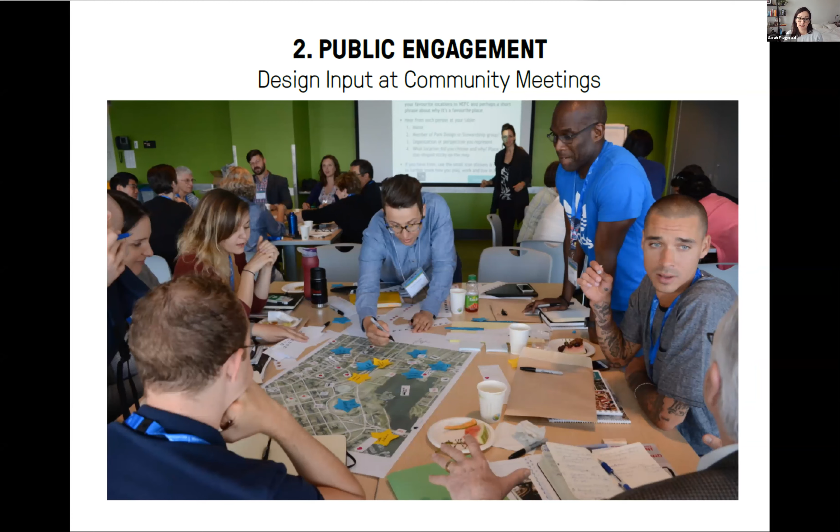Okay, no questions, so I'm going to assume it does. All right, and then the next way that you can make your voice heard is in public engagement meetings. So at community meetings, when the project has already been approved but the design isn't finalized yet, this is when somebody like me or Jorge might come to a meeting with some initial drawings and ask for your opinions about what you want to see, especially if it's a public project, like a street project or a park. It's really important to get the opinions of the people who are going to use these spaces.

So some of the types of activities we might do at a community meeting are what we call dot voting. So we might have a bunch of example pictures—this was for a park we did in Arkansas. We're like, do you want to be able to touch the water that's going to flow through the park? Do you like how this image looks? Do you like having vegetation in the stream bed? Do you want an amphitheater? Do you want benches? So people could take their little sticky notes—can you see these little arrows that are multiple colors? So you can basically vote for things that you want to see in your park. And we take that input and change our designs based on the public input.

Another thing we might do is ask people to collectively draw our ideas. So this was for that same park project, and at the community meeting, everybody got a bunch of pens and pencils, and we came up together with ideas for what should be in the park. This person said they wanted a big fountain and a stream. We didn't do a fountain, but there is a stream that runs through the park—it's getting built right now. All of these people had the idea to have the stream connecting through the park. So I think being able to draw your ideas is another way that you can communicate your opinions on public space.

And there's also postcards. With COVID, it's been hard to meet in person, so what we've started to do is mail out postcards that you can give your opinion on without even leaving your house. For example, this parking lot is now that park we saw earlier, Pacific Plaza. But before it was built, we asked people: do you live in downtown? Do you work in downtown? Because that's where the park's getting built. And then, would you spend your time in the plaza? How would you spend your time, or who would you spend your time with? What do you want to see in the plaza? We got a lot of input through this postcard exercise, and that changed our design for how the park looked.

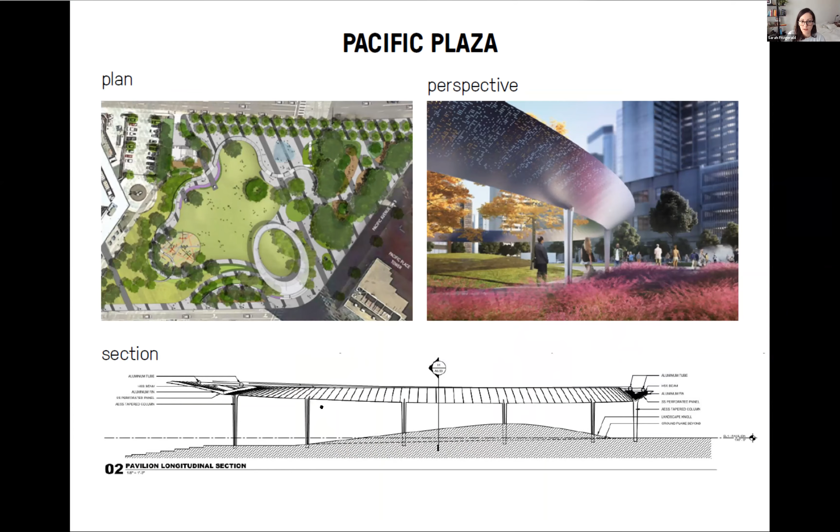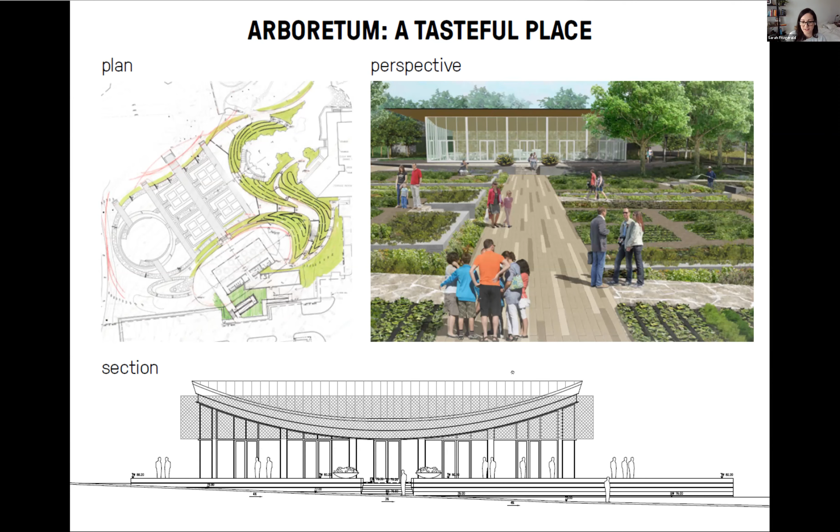Okay, so before we pick up our pencils, we have one more activity where we're going to do our little refresher. Let's see, oh, Alejandra made it too. Hey, Alejandra. Okay, let's play a Kahoot.

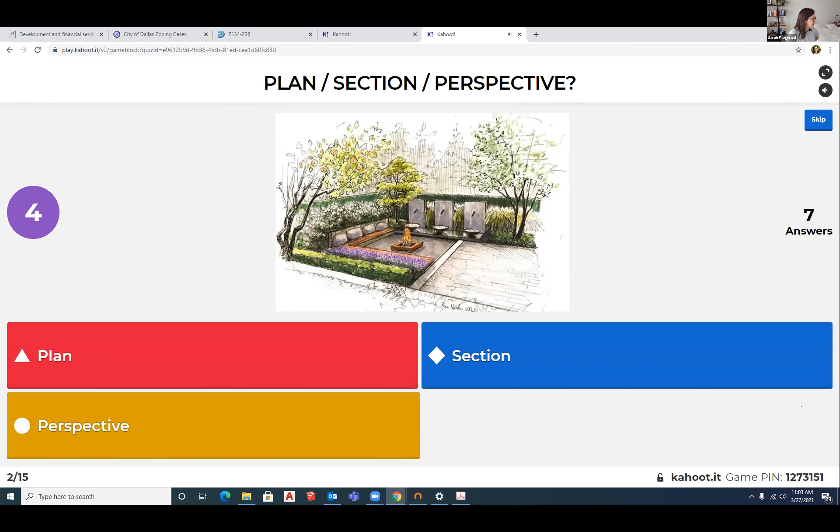Awesome. Okay, same thing, it's always the same question. What do you think? Plan, section, or perspective? Nice, y'all are fast, you're more awake than I am. Yep, good job, that was a perspective.

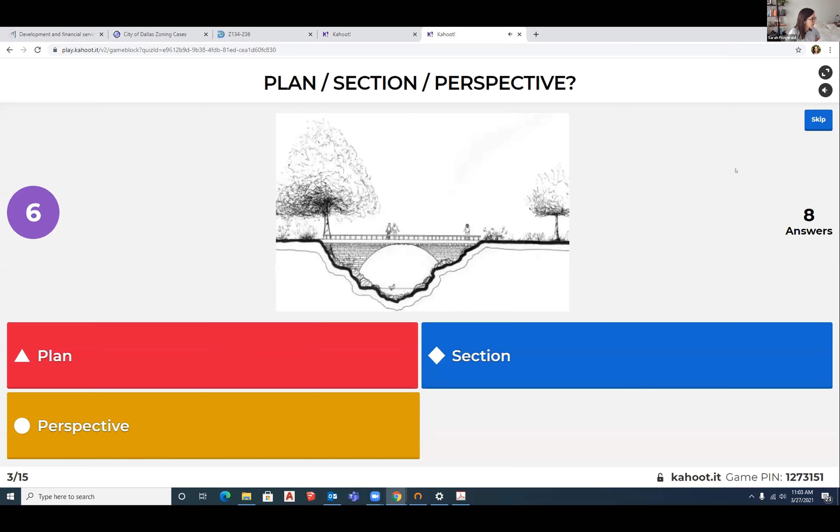How about this one? What do you think, is it a 3D view? Is it cutting through? Oh man, y'all are good. See, you've got this down.

How about this one? Plan, section, perspective. Nice, man, y'all are fast. I'm impressed, Hershey's on fire. How about this one?

I also like this activity because it exposes you to more drawing styles. Nice, perspective, everybody got that one. I love it, we're getting the hang of it.

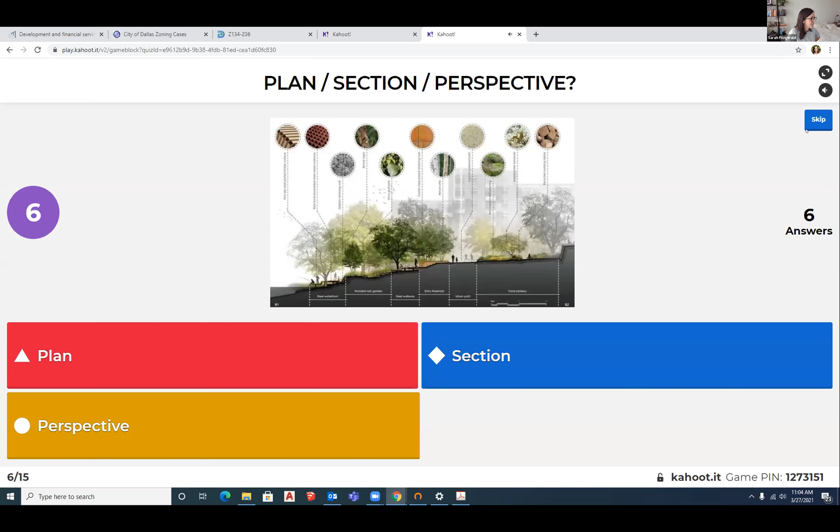Ooh, this one's kind of more complicated. What do you think? Man, all right, everybody's getting it right. Let's just do a couple more so you can see some examples of different drawings. But I'm impressed, everybody gets it. How about this one? It's kind of more artistic.

Awesome, perspective. Nice job. Okay, maybe just two more because you guys clearly already get it.

Perfect, plan drawing. All right, last one. Ooh, this one's even more artsy. What do you think? Nice, perspective. I really like all the styles that you chose. All of them are pretty cool.

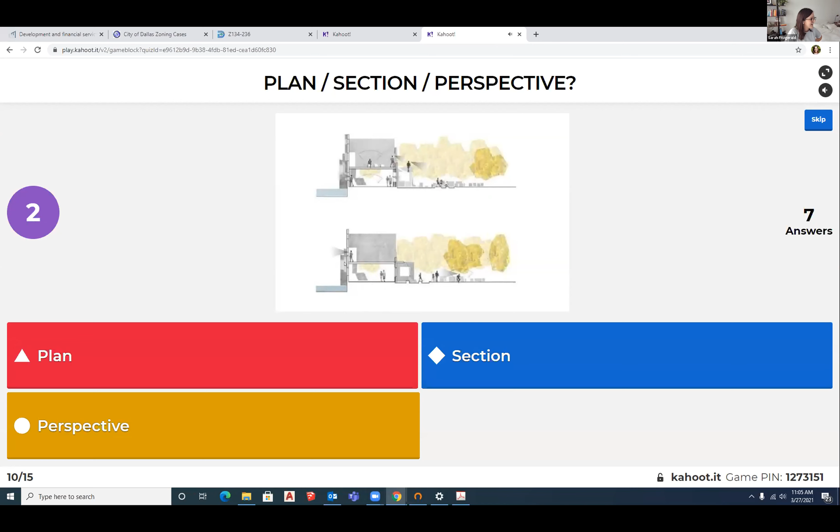They're pretty cool, huh? Okay, let's do a couple more because I think the styles that I chose are fun to see examples of different types of drawings. There's definitely no correct way. They're all sections, plans, or perspectives, but there are lots of different ways that you can render them, that you can draw them digitally or by hand, like Jorge said.

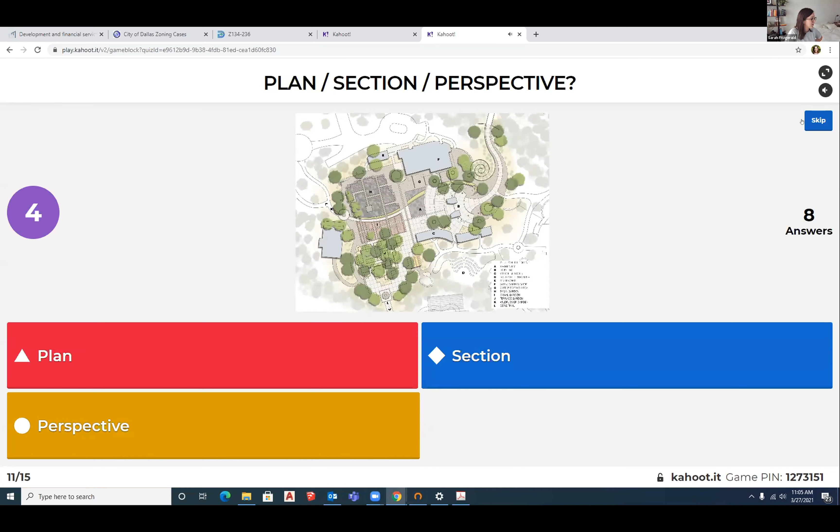This one we actually saw last week. I think it's the desert garden in Arizona. Not my favorite style, but nice. Man, everybody's so smart, I love this group.

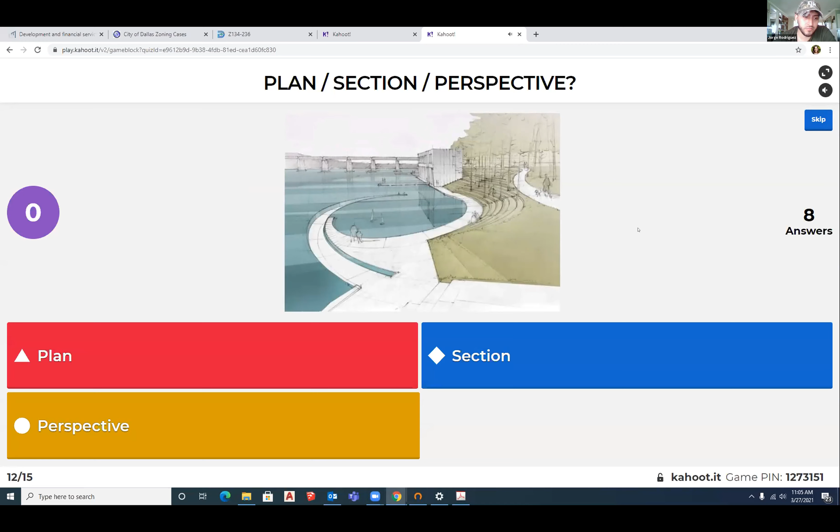So this one is fun because it's more hand sketchy with a little bit of color on top. The mood is different. Perspective, nice. All right, just a couple more. This one is fun too, it's kind of a collage aesthetic.

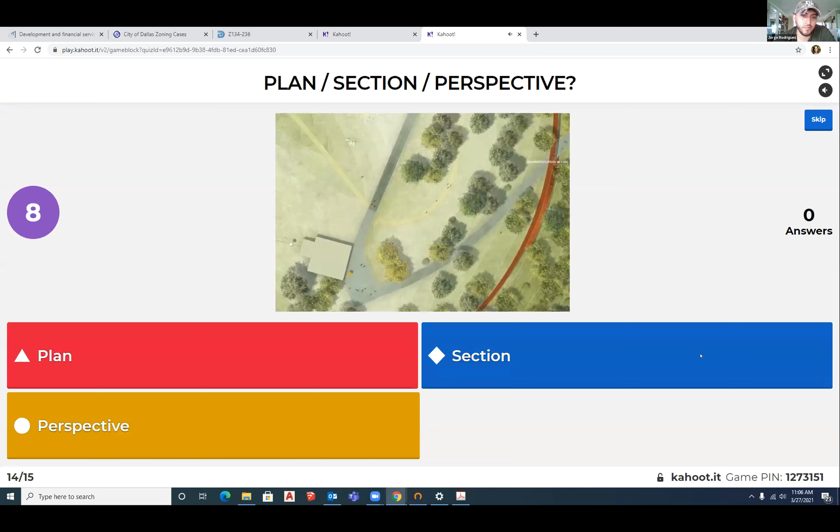Awesome, perspective. Okay, last one, very last one. What do you think? Yeah, that one was trickier. It's a plan drawing, it was more art than plan. Oh, I was wrong. Here's the last question.

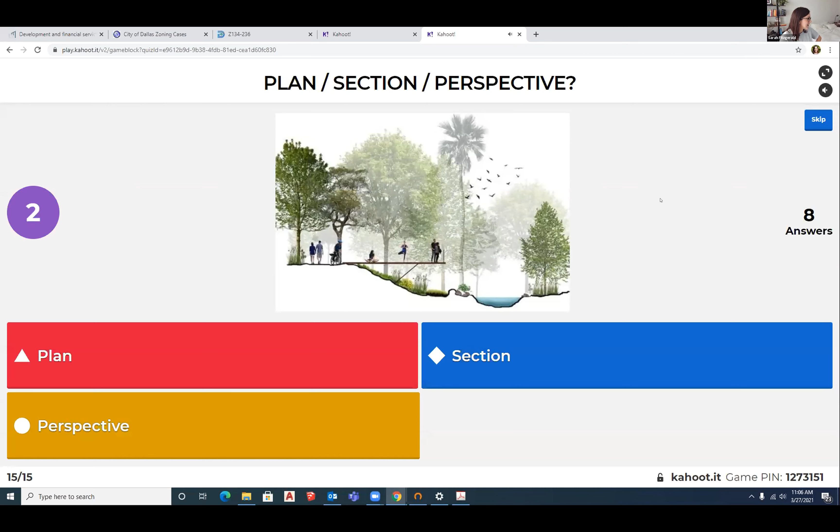So this one's fun because you see this line, but you also see what's happening behind it. So this one was hard. It was a section because it cut through the landform, but it still showed you what was happening behind. That one was tricky, I tricked you guys with the last one. All right, let's see.

Nice job, Nada, and Hershey, Hershey was killing it. And who was number one? Benoit. All right, nice job guys, I was very impressed. Even for the people who weren't here last time, you got tons of them right.

Okay, so with that in mind, we're gonna do a perspective drawing together. Kind of in the theme of the presentation, this is gonna be a streetscape, a public space, and we're gonna draw our ideas for the street in the activity book.

So does everybody still have these activity books that came with the packet? Recognize this? Yes, okay great. So I'll give you a second to find it if it's somewhere else in your room, open it up.

And we're gonna start with a perspective drawing because I think these are the most intuitive, because this is how it looks kind of in real life, right? So what I'm gonna do, let me try to switch my camera.

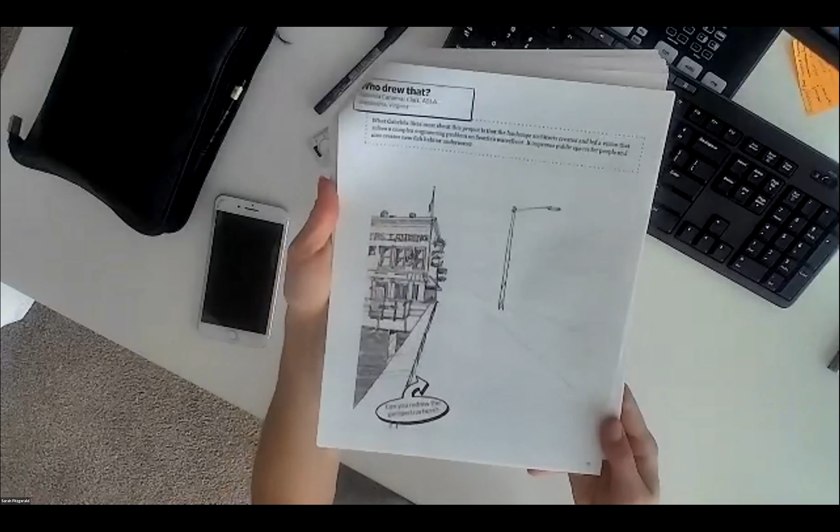And we're actually going to be working on page 33 because they have all this space for us to design. I don't have that. Oh, you didn't get a packet? No. Okay, do you have a piece of paper or anything at home? Yeah, I do. Okay, I think you can probably still draw it even though you don't have the packet. The central idea is just to draw the street the way that you would like to see it, so I think you can still participate even just with a piece of paper.

So I'm gonna open, these are all my pencils that I've collected over the years. I'm gonna start with, remember we talked about last time that pencils usually have a number on this end.

And what number pencils did you get in your bag? I think there was a 2B maybe? 2B, 2H, you guys know what I'm talking about, HB, see all these numbers on the end of the pencils? Yes, I got 4B, 4H, and HB. Okay, 4B. I've got a 3B, it's close. 4H and HB. So remember the trick to remembering, what's that?

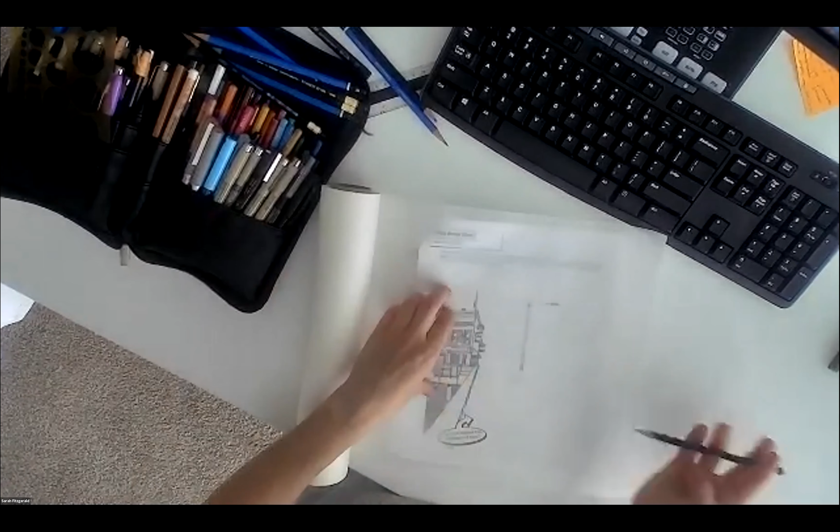Okay, so we're just going to start drawing. It says, can you redraw the perspective? That's an option, you can copy what they have on page 33, but really I would love to see what you guys have ideas about for public space. So I'm going to just make up my own streetscape, and I encourage you guys to do the same for what you would like to see.

It gives you some guidelines, this is a perspective, so the vanishing point is somewhere in the middle, and that's how you draw your lines. I'm sure you guys have had art classes that go over this stuff. So I'm going to start by drawing the edge of the street.

So in my idea, all of this space is all for pedestrians. I have to keep the street lamp on the pedestrian side because it would be a little dangerous to have a street lamp in the way of bikes or cars in the streetscape.

The first thing I like to think about is who's traveling in this space. So I am a bicyclist, so I love to think about how we can make more space for people to cycle in cities so that you can get around and not have to be in a car. So right next to my pedestrian line, I'm going to make a little lane for bikes.

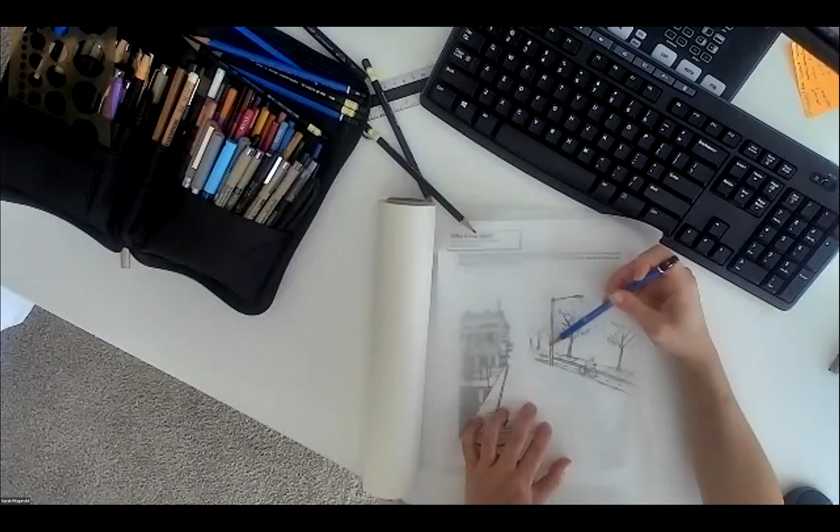So in my example, I think I'm going to add a little bit more sidewalk on the other side of the trees, and then start my buildings. But you can't even really see a lot of the building spaces.

My trees are probably a little bit too big, but I always love a big tree. If you're going to make a mistake, have a bigger tree than a smaller tree.

Maybe this building is taller than the others, and its roof line kind of shows more. The front door on the other side has a double door.

And man, in my drawing, I didn't even make any place for cars. I think that'd be an awesome place to be if there was just sidewalk, tree, bike lane, sidewalk. And you know what? I might even put another row of trees on this side.

It's always a good idea to start with the foreground, because I started with the background, and now if I plant a tree in front, it would kind of obscure all of the work I just did in the back. So maybe for this drawing, I'll skip the trees.

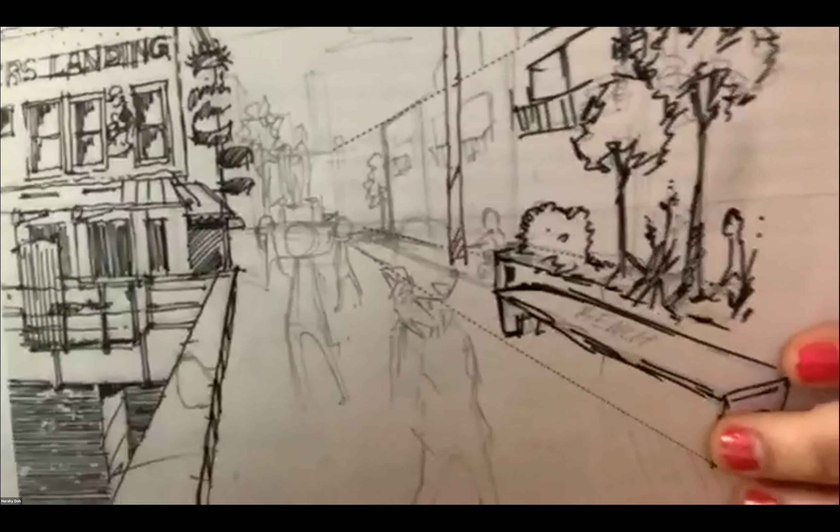Some people, and you have... Ooh, what's in the back in the center? What is that, I like that. It's a fountain. Okay there you go, is it a fountain that you said? Yeah, cool, that's pretty cool.

Love that, wow, great job. Man, you guys are artists. Anybody else want to share?

Nada, I know you're a strong drawer. Can I call on you to share? Yeah. Here, can you see? Or do you want me to move it closer? Kind of, yeah. It's a modern style type.

I love it, those are kind of like classic benches with the armrests. Awesome, lots of vegetation in there too. Love that you even put the bike lane symbol on the bike lane, that's great. Super fun, that seems like a great space to be in. Love it, nice job man.

So who else in your pack might want to share? Did you guys get colored pencils too? Yeah, we got colored pencils.

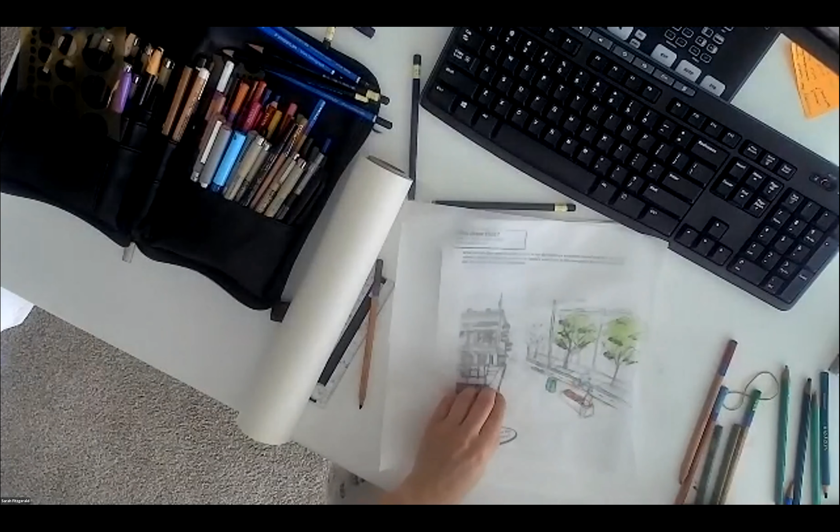You might have more detail on the things that are closer to the eye. So in this very first tree, I might even have some stippling. I might add some more detail to it, and then a little less detail in the middle tree. And then I might not put any of that detail in the far tree, maybe just a little shadow.

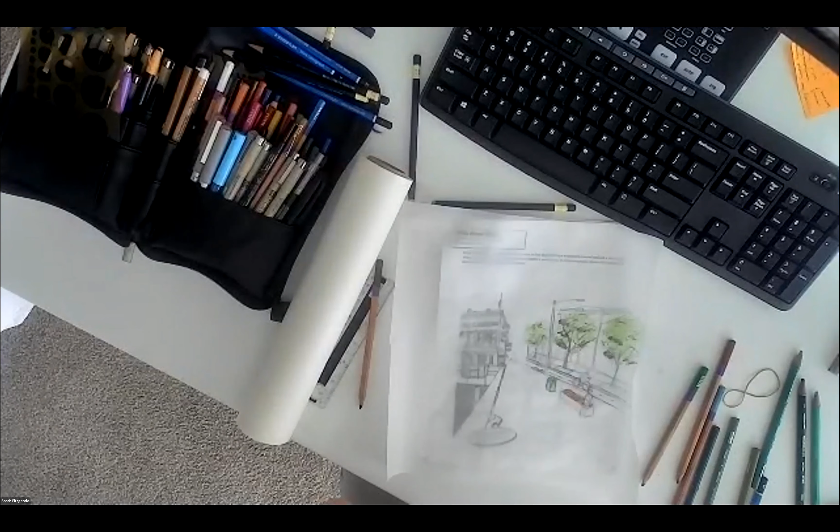Another fun thing you guys can experiment with, I learned this in a watercolor class once: shadows can actually have a little bit of color. If you look closely in watercolor paintings, a lot of times shadows will actually be purple, which is really fun to think about - how the color palette can affect the overall mood of the drawing. Just because of the greens and blues I chose, my drawing so far is looking like a bright sunny day. But if I were going to draw it on a cloudy day or at sunset, you would probably choose different colors, right?

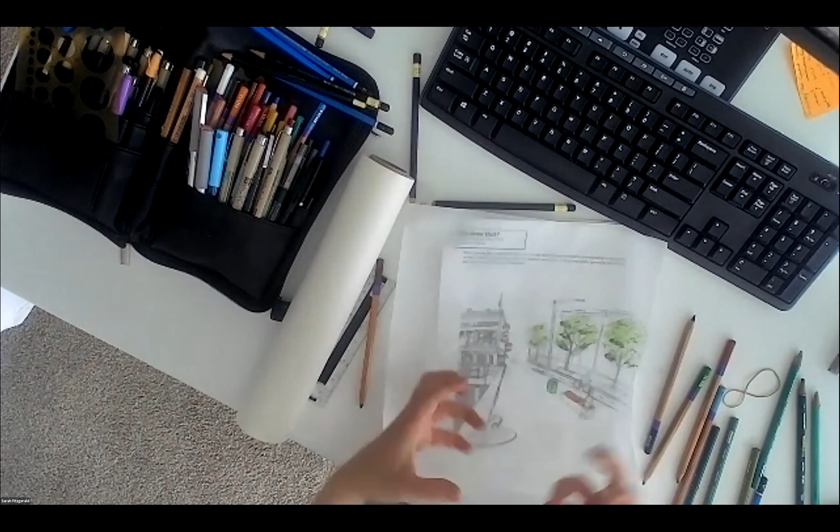When I lived in California during school, their bike lanes were always colored green. I'm just going to use that inspiration and make this a green color too. It made it really obvious so that pedestrians wouldn't accidentally step in a bike lane and get run over by a speeding bike.

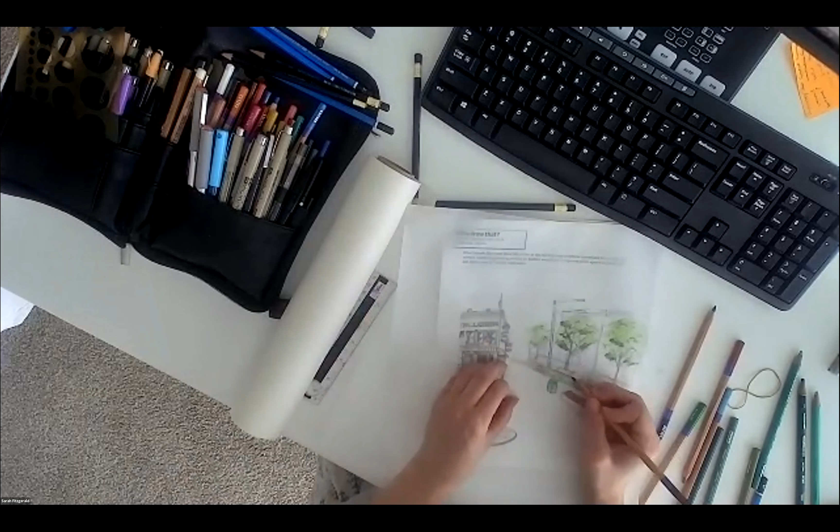And then for my tree grates, I'm thinking it'd be fun if they were like a rusty kind of metal look. I don't know if you guys have ever seen Corten steel - maybe I'll Google it real quick and share. So, wow, these are fun. Look at these - circular tree grates that even have little leaves kind of inside of them. I love that, it's even more creative than what I was drawing, just the squares.

It's fun because there's this pattern change with the tree grates on the sidewalk where the pedestrians are, and they kind of break the rigid lines - they break the rules of one color dark pavement and then sidewalk light pavement. This is a fun trick we do a lot, that some people call slippage, where you have an element that breaks the rules and goes onto a different element. I really like that inspiration, that's fun.

And then maybe I want to have a fun little pattern. Paving patterns are something I never really thought about until I got into landscape architecture. But just like what pavers we use - is it just going to be solid concrete, or is it going to have a fun design in the pavement?

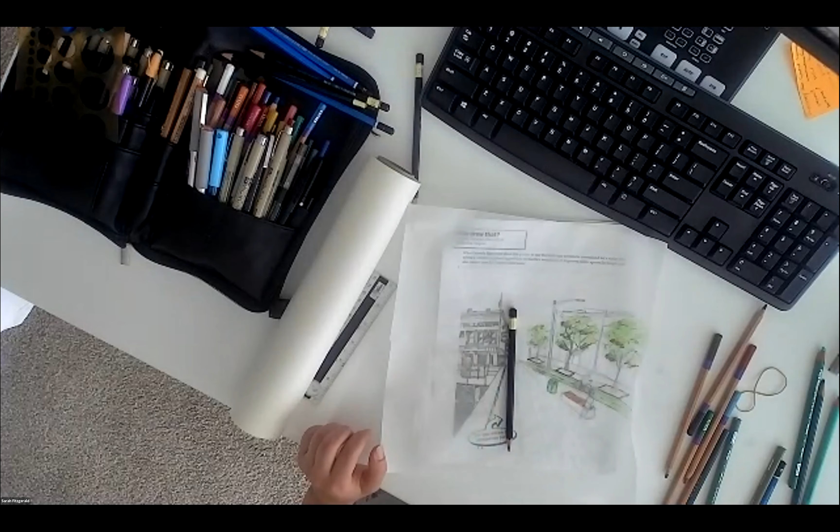I'm going to share my screen again and we can look at some examples of that. So, paving pattern sidewalk - some of these are residential, so maybe we should say street. You can do fun things like random colors and little squares. Wow, this is fun, this is like a super graphic that somebody designed in Plan to get these really perfect shapes. You can do things like have spaces for an artist to come if you've got a big public space where artists can render something.

You've got these classic cobblestone streets you see in some older cities. This is a really fun example of just using asphalt, which is really cheap, and then having a painting pattern on top of it - love this example. This one is kind of more classic with straight lines of different colors and a nice circular tree grate in the middle. So yeah, you can be really creative with even basic elements - you think sidewalk is a sidewalk, but a sidewalk could look a lot of different ways.

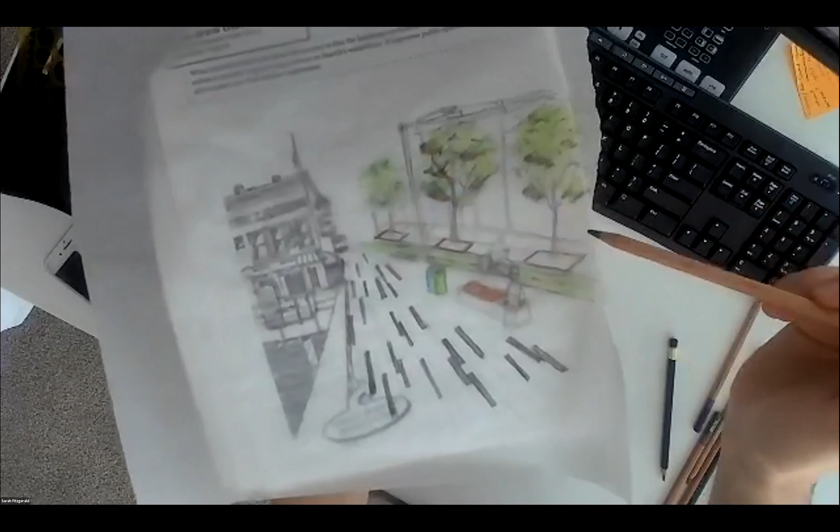So this is kind of what my drawing is looking like on my trace paper. I've got this linear paving pattern inspired by some of the things we looked at before, and my little wooden bench with my ghost person that I didn't color in, resting and looking at the waterfront. And then my green bike lane. I was starting to do my tree grates and my trees, some nice leafy trees like an oak or a cedar elm in springtime, really green. But I really liked Jorge's idea of having a monument at the end around a roundabout. After we get off the call, I might have to finish my drawing to include that.

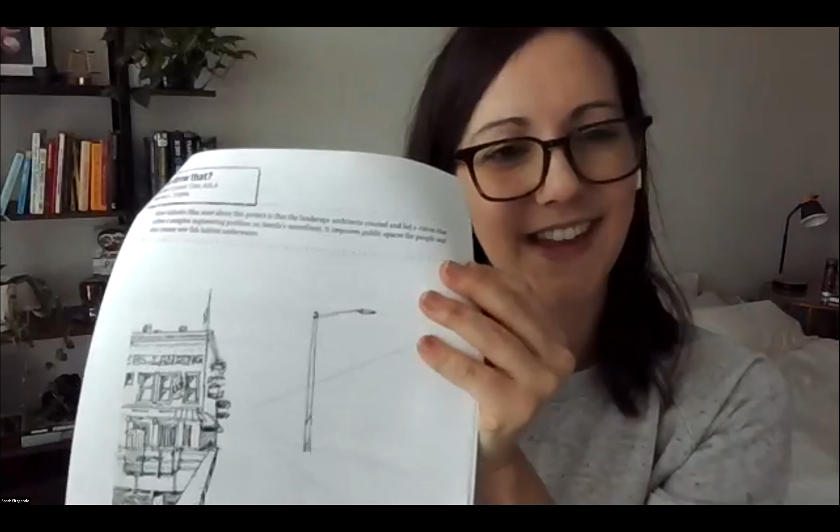And the beauty of using trace paper, like I said earlier, is - wait, where's my camera here - is that I did this on trace, but if I didn't really like that design, I can take it off and start over. Or if I start a drawing and I don't like the idea after all, I can just crumple it up and throw it away. So I'd really encourage you guys to use that trace paper in your packets too, because it's a great way to be quick and creative.

Because sometimes when there's only one sheet, it can be a lot of pressure, like, oh, you don't want to mess it up, and oh, I better use pencil so I can erase it. But having trace paper can be a good way to test some ideas and discard it and test a different idea. That's something we use in the office all the time for quickly iterating and coming up with a lot of ideas.

All right, well, I think we're coming up at the end of our time. Because we had so much fun with the perspective, we didn't really get to do the alleyway. Oh, I even forgot to update the text. But if you wanted the next challenge - this one to me is a little harder because we don't think this way in a day-to-day setting - activity 6 in the booklet, that's page 18. This is a plan drawing exercise that we might get around to next time, but if you wanted to use your trace paper and start sometime this weekend, if you wanted to practice drawing, basically it's an alleyway that you would do a plan drawing for.